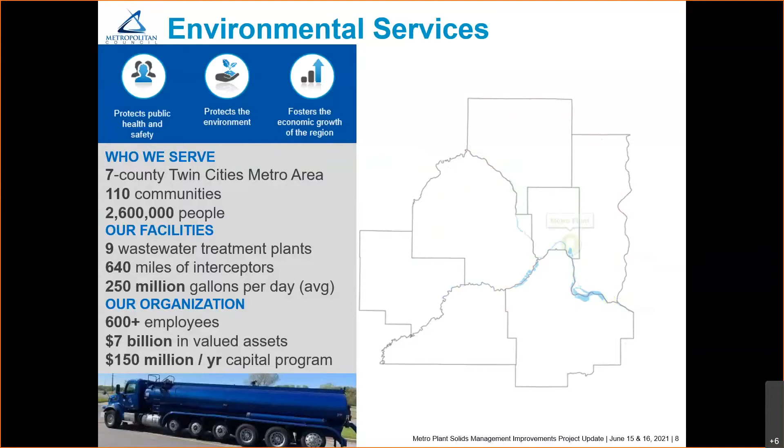Metropolitan Council Environmental Services is a regional wastewater utility. We provide wastewater collection and treatment services to 110 cities in the 7-county Twin Cities metropolitan area. Our infrastructure includes 640 miles of pipes, called interceptors, which convey wastewater to 9 wastewater treatment plants. On average, we treat 250 million gallons of wastewater every day, generated from 2.6 million people who live here. The wastewater system is valued at over $7 billion.

To keep the system operating in good condition, MCES spends about $150 million per year in capital projects. To provide the level of service that the region has come to expect, our organization employs about 650 people, including licensed operators, electricians, machinists, service workers, and other trades, as well as scientists, engineers, and planners. MCES is proud of the work that we do. The services that we provide protect public health, protect the environment, and support economic growth of the region.

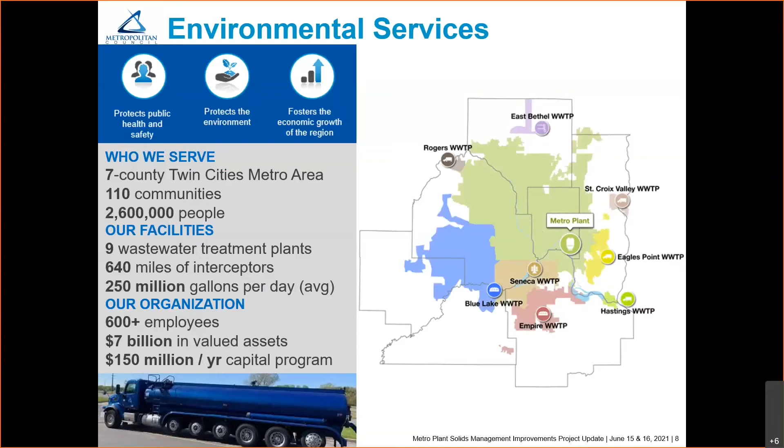The proposed project will be constructed at the Metropolitan Wastewater Treatment Plant located at 2400 Childs Road. The Metro plant treats 180 million gallons of wastewater every day, about 75% of the region's wastewater.

The Metro plant also treats about 850 wet tons of wastewater solids on a daily basis. It might be hard to imagine how much 850 wet tons is, so my staff did some calculations to help us visualize the volume. 850 wet tons is equivalent to 20 airplanes, 140 elephants, or 420 cars.

The incineration process reduces the 850 wet tons of wastewater solids down to 40 tons of inert ash. The energy recovery system reduces purchases of natural gas and electricity by $2 million per year.

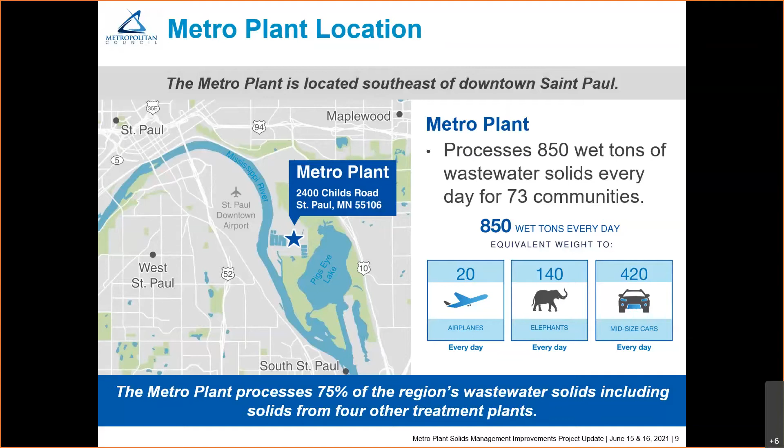The Metro plant needs additional solids processing capacity for 2 reasons: asset preservation and growth. In 2025, the existing incinerators will be 20 years old and in need of a very intensive renewal project. We estimate that the renewal work required will take about 1 year for each of the 3 incinerators. We currently do not have the capacity to take an incinerator out of service for a year. By building a 4th incinerator, we will have the capacity needed to renew existing incineration facilities.

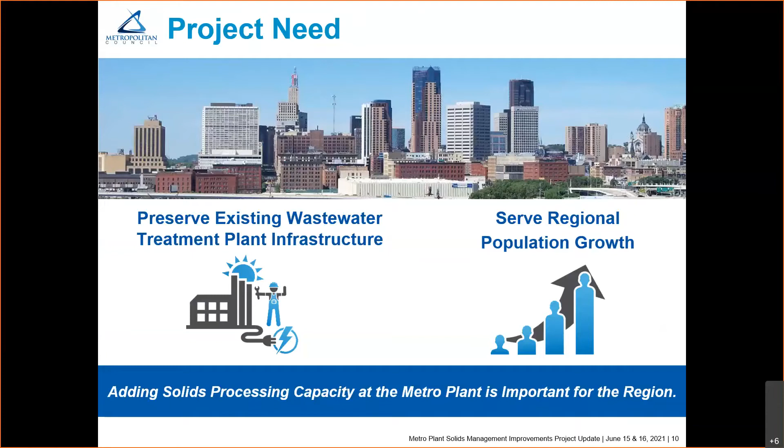Additional capacity is also needed to serve regional population growth. The population of the Metro plant service area is expected to increase by 500,000 people by 2050. While wastewater flows are historically holding steady due to water conservation efforts and reductions of inflow and infiltration, the solids generated will increase with population growth, and capacity is needed to treat an additional 215 wet tons per day by 2050. The region is growing, and MCES needs to support regional economic growth by maintaining state-of-the-art treatment facilities at affordable rates.

Currently, MCES is undertaking a minor capital project to address incineration equipment concerns. Beginning in 2024, MCES proposes to begin construction of a fourth parallel incineration train similar to our existing systems, with comparable energy recovery and air pollution control systems. An extensive renewal will then be completed on the existing incinerators 1, 2, and 3 from about 2027 to 2029. In summary, MCES will be spending roughly $200 million over the next 8 years on Metro Plant solids projects.

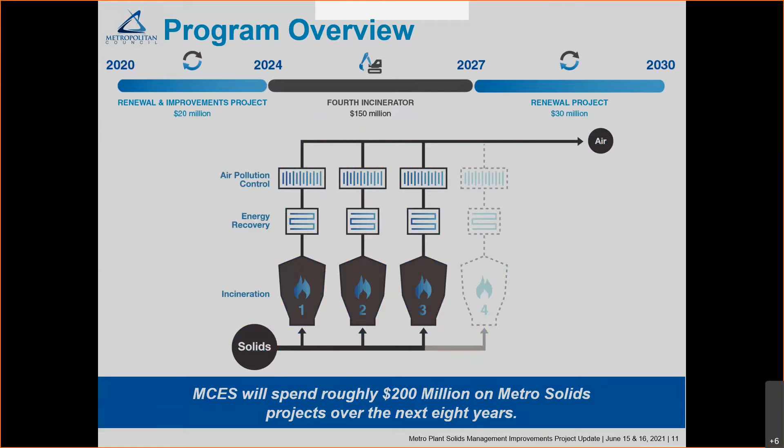Our proposed project includes expanding the existing solids management building by 21,000 square feet, as shown on this slide. The incineration equipment, which is shown in green, will be housed in the expansion. The stack for the fourth incinerator will be located at the same location and height as the existing 3 stacks, which are noted on the right side of the slide.

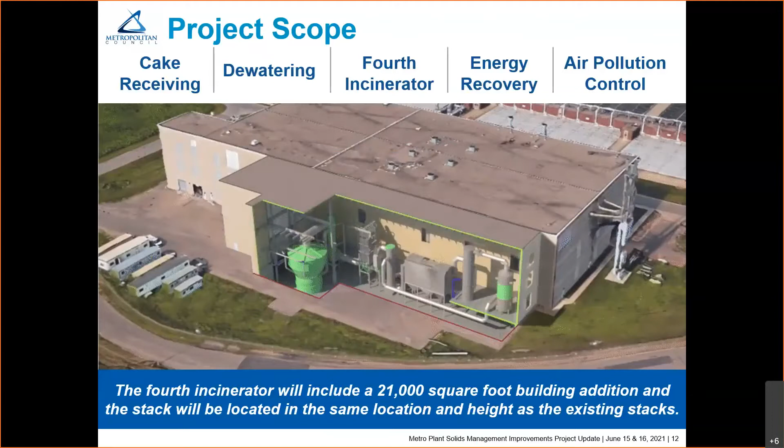The project will include additional dewatering facilities, a fourth incinerator, energy recovery including new steam turbine generator, and air pollution control. The project also improves receiving facilities so that MCES can accept dewatered solids from the other MCES treatment plants on an emergency backup basis.

Significant outreach activities were performed in 2018 to local government entities, our customer communities, as well as our industrial customers, regulatory agencies, businesses around the Metro Plant, neighborhood districts in St. Paul, community organizations, and environmental advocacy organizations. In addition, over 4,000 mailings were sent out to residents surrounding the plant to let them know about the project. MCES held an open house event and formal public hearing to receive public comments on the project.

During the public outreach held in 2018, there were no concerns expressed with regard to odor, noise, or traffic. As part of the facility plan, an alternatives analysis was completed, which included cost and non-cost factors. The fourth incinerator was found to be the most cost-effective and sustainable alternative to meet the region's wastewater needs.

Following the public outreach, and responding to the public comments, the Metropolitan Council formally adopted and approved the facility plan for the project in October of 2018. Later on in the presentation, I'll provide the address for our website where the facility plan can be viewed.

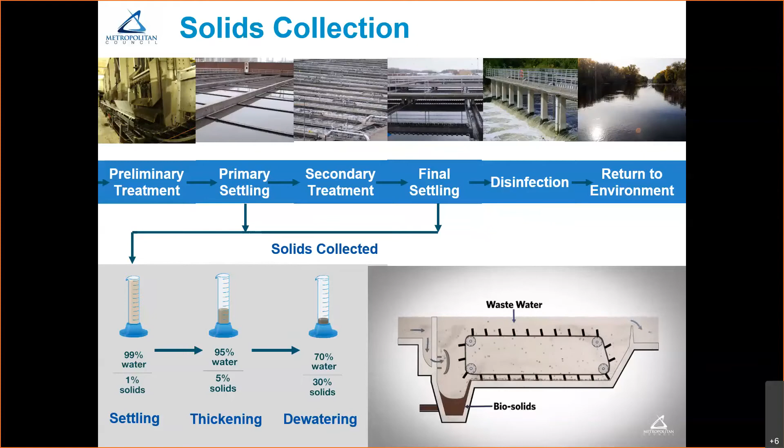The solids that are collected have a lot of value. After the wastewater solids are dewatered, they have a heating value that's similar to wood or low-grade coal. You probably don't want to throw our solids on your next campfire, but they do make a great renewable fuel source that is ideal for incineration.

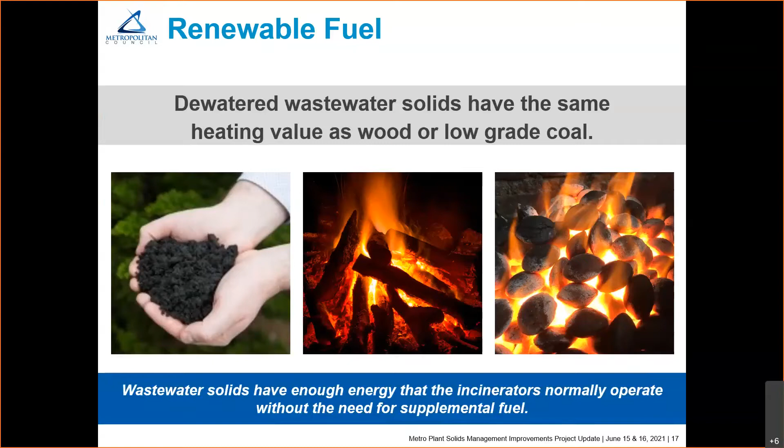At the Metro plant, we use fluidized bed incineration technology. A fluidized bed incinerator contains a bed of sand, and air is distributed under the bed, which causes the sand to swirl and act like a fluid, much like a boiling pot of water.

Once reaching a temperature of roughly 1400 degrees Fahrenheit, the solids have enough energy that the incinerators normally operate without the need for supplemental fuel. As long as the solids are fed, the combustion continues. The combustion of the solids releases flue gas containing water vapor, carbon dioxide, and fine ash particles through the top of the incinerator, which all go through further treatment.

Like Janine mentioned, MCES has to process 850 tons of wastewater solids every day, and one of the major benefits of incineration is that it makes 810 tons of that material disappear. After incineration, we're left with only 40 tons per day of dry inert ash, which is roughly 2 trucks per day. If we did not have incineration and had to add drying agents and other materials to control pH, we would end up running roughly 75 trucks per day from the Metro plant.

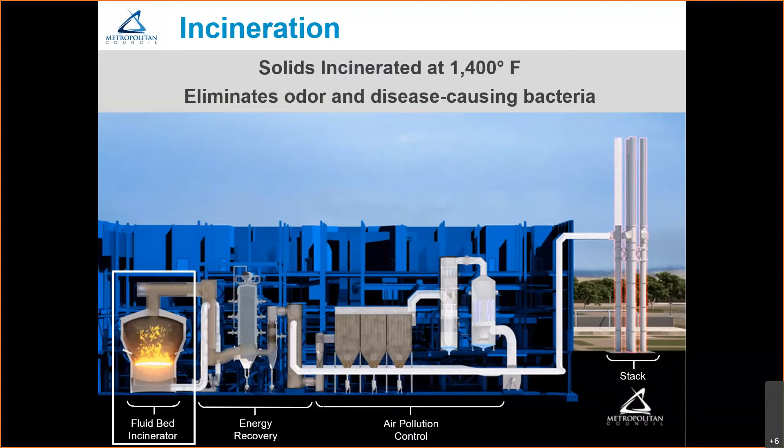Following incineration, the hot flue gas goes through an energy recovery system, which captures the thermal energy, ultimately reducing purchased natural gas and electricity. The first location where energy is recovered is at the primary heat exchanger. The heat exchanger preheats the air that's going into the bottom of the incinerator, minimizing the need for supplemental fuel and natural gas to maintain combustion.

The next location where energy is recovered is at the waste heat boiler. The waste heat boiler consists of hundreds of metal tubes through which water is pumped to produce steam. During the winter months, the steam provides heating to buildings around the plant. During the summer months, the steam is sent to a steam turbine generator to generate electricity. Electricity generation from wastewater solids at the Metro plant accounts for roughly 10% of the plant's power demand. The combined savings of purchased natural gas and electricity is roughly $2 million per year.

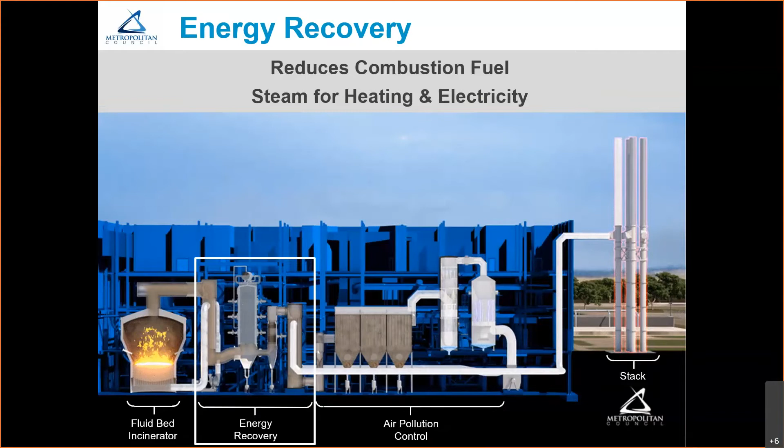Following energy recovery, the Metro plant uses state-of-the-art air pollution control equipment to meet very stringent air emission regulations. First, the flue gas goes through a carbon tower where carbon is injected to remove mercury. Next, a baghouse uses over 800 cloth filter bags to filter out particulates and heavy metals. Next, a wet scrubber uses water cooling sprays to remove particulates and acid gases. Next, a wet electrostatic precipitator collects fine particles onto electrically charged tubes.

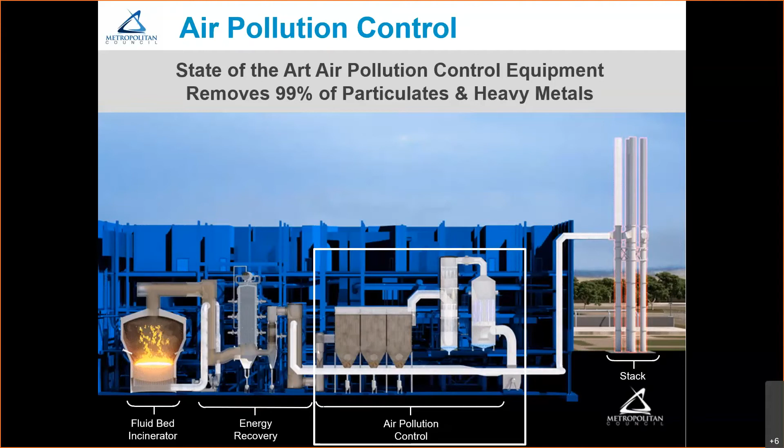Finally, the gas travels through a heat exchanger, which removes any remaining moisture, and then out the stack. All in all, the air pollution control system removes over 99% of all particulates and heavy metals leaving the incinerator. The emissions leaving the stack are clean, colorless, odorless, and have no visible plume. And with that, I'll turn it over to Renee to talk about the air permitting and environmental review.

Thank you, Stephen. My role is to present some of the preliminary design work, including evaluations we completed to obtain an air permit for the fourth incinerator, and the evaluations we completed for environmental review.

MCES recognizes that neighborhoods surrounding the Metro plant include environmental justice areas identified by the Minnesota Pollution Control Agency, or the MPCA. This map is from the MPCA's website. 40% or more of the residents in the blue areas reported income less than 185% of the federal poverty level. 50% or more of the residents in the green areas are people of color.

Using the MPCA's framework to evaluate environmental impacts of the fourth incinerator project, we found that this project will have no significant detrimental impacts to surrounding communities. These evaluations, which are included in the application to modify the plant's air permit for a new incinerator, and the Project Environmental Assessment Worksheet, or EAW, will be independently reviewed by the PCA.

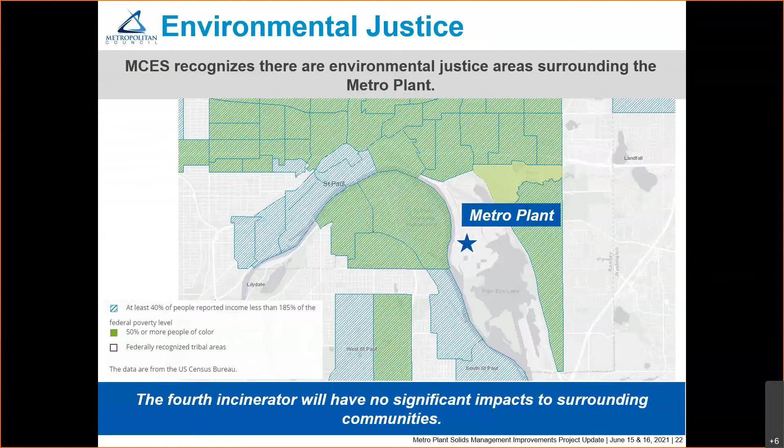As part of the air permit amendment, before the fourth incinerator is constructed, MCES must demonstrate through computer modeling that after construction of the project, the Metro plant will continue to meet national ambient air quality standards at the plant property boundary. National ambient air quality standards have been established by the Environmental Protection Agency for six criteria pollutants for the protection of human health and the environment.

Our preliminary modeling results indicate that the Metro plant will continue to meet all national ambient air quality standards and that the project will have no significant impact on the air quality for surrounding communities. These modeling results will be updated in the near future because the PCA is updating the modeling requirements.

If you look towards the bottom of the criteria pollutants, PM 2.5 is small airborne particulate matter, or material with a diameter less than or equal to 2.5 microns. PM 10 is particulate matter with a diameter less than or equal to 10 microns. On the next slide, I'm going to talk a little bit more about the particulate matter pollutants.

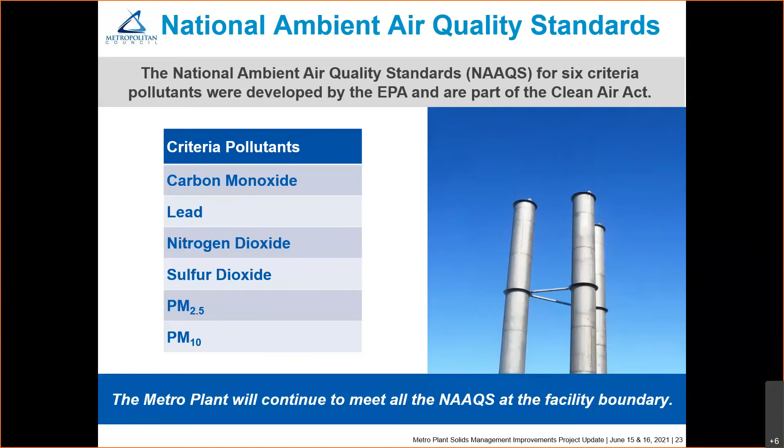The graph on the left side of this slide shows a gradation of micron particle sizes, from the smallest, a smoke particle at 0.5 microns, to the largest, a coffee ground at 400 microns. A PM10 particle is about the size of a pollen particle. Breathing in large concentrations of PM10 can damage your lungs, and that's why there's an air quality standard in place for PM10.

In 1994, the blue area shown on the map surrounding the Metro plant and other industries was above the national ambient air quality standards for PM10. The area includes Childs Road and Red Rock Road. When an area exceeds a national ambient air quality standard for any given pollutant, the PCA identifies the area as non-attainment for that pollutant.

In response to non-attainment for PM10, the MPCA developed a State Implementation Plan, or SIP, which is a collection of regulations and requirements for the area to bring it back below the national ambient air quality standard for PM10. Emissions reductions successfully brought this area back into attainment for PM10 in 2002.

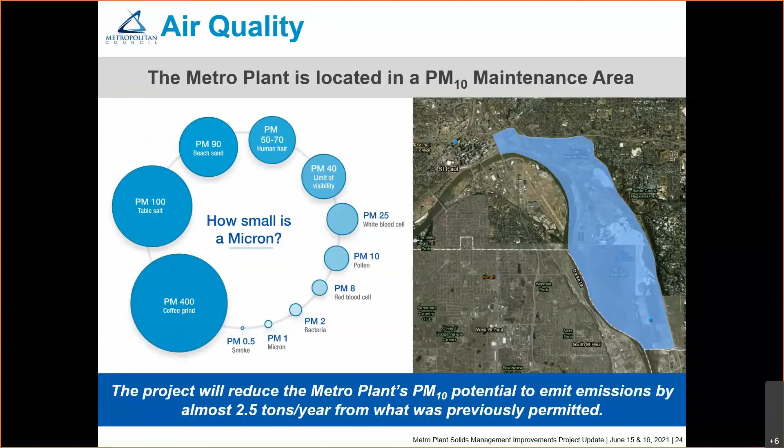The existing Metro plant incinerators have an exceptional track record of environmental compliance, and MCES is proud of their performance. The incinerators have performed so well that emissions data from the Metro plant were used by the EPA in establishing new, more stringent standards specifically for incinerators in 2010.

In 2010, the EPA set new air emission standards for existing sewage sludge incinerators constructed before 2010, and even lower standards for incinerators constructed after 2010. These standards are based on treatment technology and are separate from the National Ambient Air Quality Standards presented previously. The existing incinerators at the Metro plant were constructed in 2005, so the standards for existing incinerators apply.

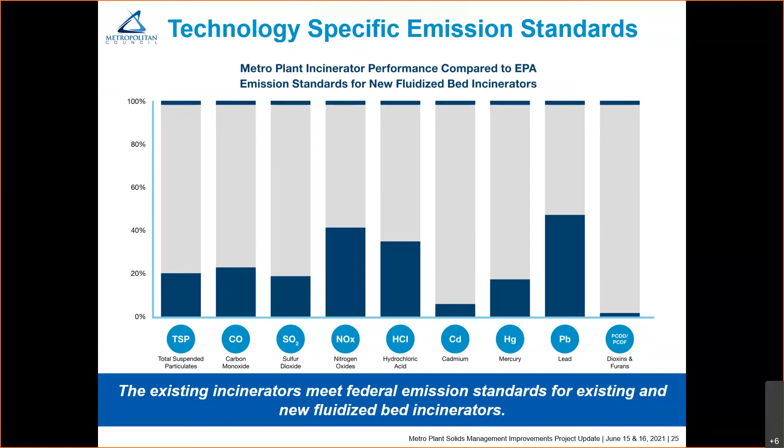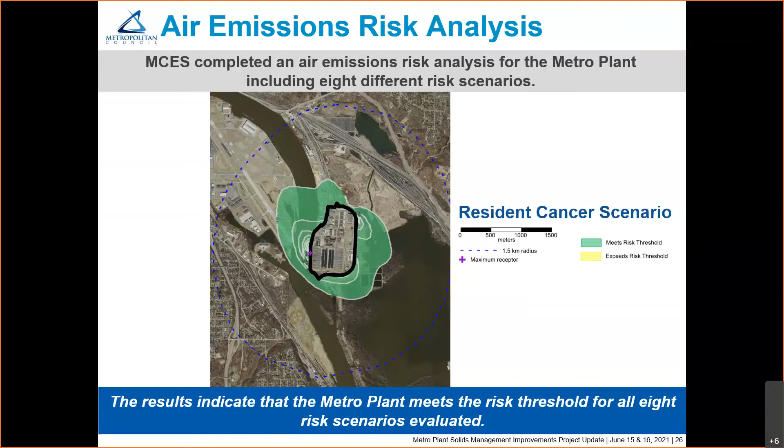Next, I want to talk about greenhouse gas emissions from incineration of wastewater solids and also wastewater treatment plants. Greenhouse gas emissions from the 4th incinerator are partially offset by the energy recovery equipment that Stephen presented earlier. However, the real point is that wastewater treatment as a whole contributes very little greenhouse gas emissions in the overall scheme of things.

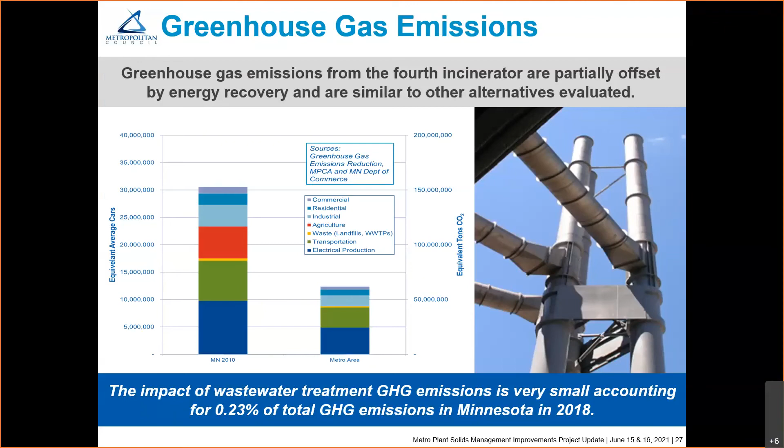Incineration technology at the Metro plant has been a key factor in reducing odors from the Metro plant. Before the fluid bed incinerators were installed in 2005, the Metro plant received about 70 odor complaints each year. After the fluid bed incinerators were constructed and with odor control improvements around the plant, the number of odor complaints that the Metro plant received reduced to 0.

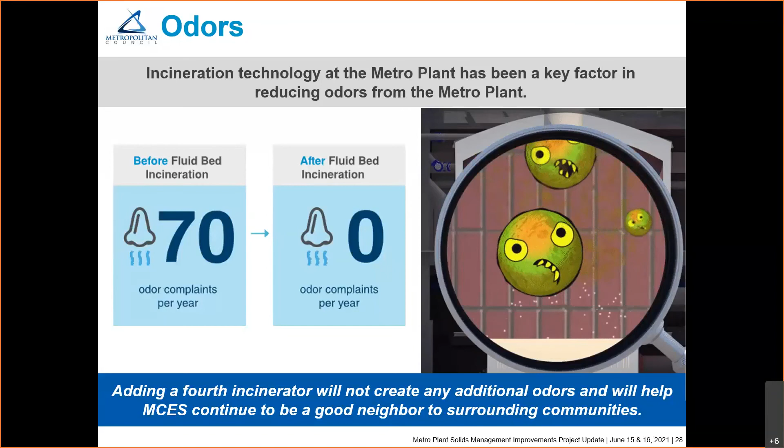We don't really receive any odor complaints these days. Adding a 4th incinerator will not create any additional odors and will help MCES continue to be a good neighbor to surrounding communities.

The impact of the project on water quality is also a question to address on the environmental assessment worksheet. The Metro plant is located next to the Mississippi River and Pig's Eye Lake. The Metro plant has played a key role in improving water quality in the Mississippi River since its construction in 1938. The Metro plant has 8 consecutive years of perfect discharge compliance.

Although this project does not directly impact liquids treatment, the addition of solids processing capacity at the plant will help minimize the risk of not being able to collect and remove solids from the liquids treatment system. There are no proposed changes to the liquids or stormwater discharges as part of the project, and nearby water resources will not be impacted by the construction or operation of the 4th incinerator in either the short term or the long term.

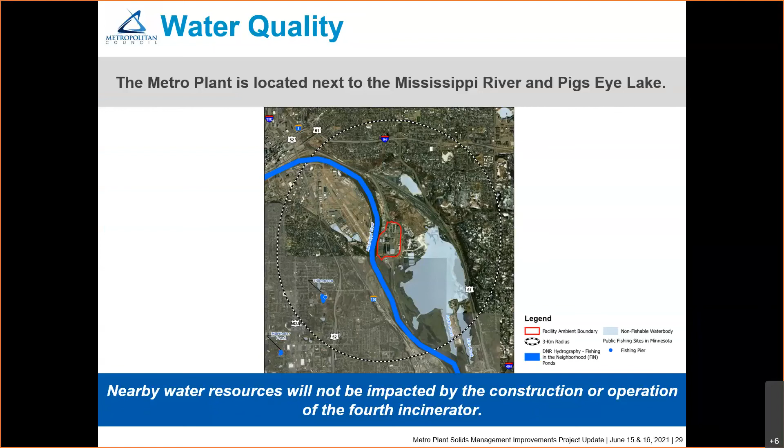Adding a fourth incinerator will require a major amendment to the Metro Plant's air permit. After the PCA reviews the application for a permit amendment, they will issue a public notice, potentially a public hearing on the amended air permit, and then issue an updated air permit for the Metro Plant.

Since the Metro Plant is located in the SIP maintenance area, the project will likely require SIP review by the EPA. Once the EPA reviews the SIP, they will publish the proposed revision, if any, in the Federal Register and then approve it. The environmental assessment worksheet is not required for this project, but MCES will voluntarily submit one to the PCA to provide full transparency regarding the project.

The purpose of the EAW is to disclose potential environmental impacts of those projects that may have significant environmental impact, and to identify mitigation measures prior to construction or permitting. After the EAW is reviewed by the MPCA, they will issue a public notice, again, potentially a public meeting.

The PCA will decide if additional work is needed or if an environmental impact statement, EIS, is required. If an EIS is not required, the MPCA will issue what is called a negative declaration supporting why an EIS is not required and the findings of fact.